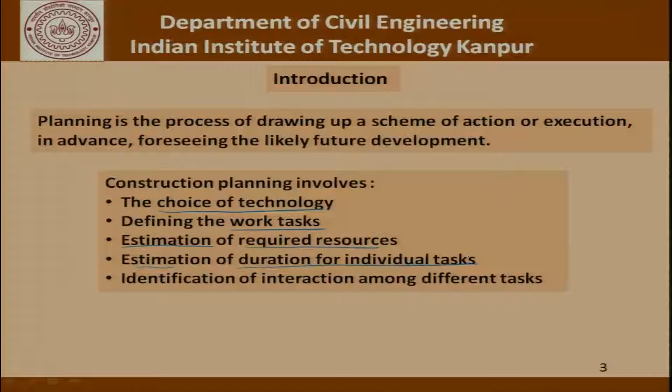Then there is this aspect of estimation of required resources. We break a job down to different activities, different tasks, and then try to find out for each task or job what are the resources required in terms of manpower, equipment, consumables, and so on. The estimation of duration is a very critical part of our planning exercise. We must know whether a project is going to be completed in 10 months or 20 months or 2 months.

So, in order to be able to do that effectively, accurately, we have to have an idea of the resources that are required and whether or not by just increasing the resources that we allocate to a particular activity, can we keep reducing the time. It may not be possible sometimes to reduce the time beyond a certain point.

Identification of interaction among different tasks. This is a very critical part of our understanding when we try to analyze whether we can take up one task without completing some others. Which tasks in a particular project can be independently taken up.

If one process requires another process to be completed, for example, in the kind of boundary wall example that we talked about, we cannot fabricate the angle unless the angle has been procured. We cannot fabricate the reinforcing bars for the footing or the columns unless they have been procured. But once they have been procured, we can go ahead and fabricate the reinforcement cage for the footings or for the columns. So, basically identification of interaction, determining the interdependencies is a very important part of project planning.

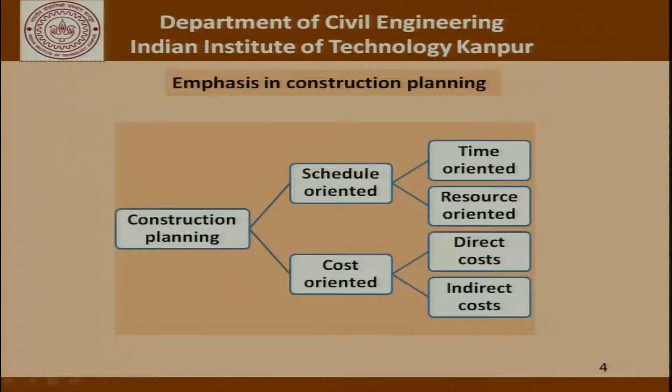So, the emphasis in construction planning is either schedule oriented or cost oriented. In the schedule oriented side, we have time and resource orientation, and in the cost oriented construction planning, we are most of the time talking about direct and indirect costs associated. Now, we talked about the different types of plans. It could be the time plan. So, basically what we are talking about here is the schedule. How much time it is going to take to complete an activity. If we are slipping, then what should be done to cover the time and so on.

Then there is the cost plan. How much is the project going to cost? What is the kind of cash flow that we need? If we want to accelerate the project, try to complete the project earlier, what is the kind of additional cost that we need to incur and so on.

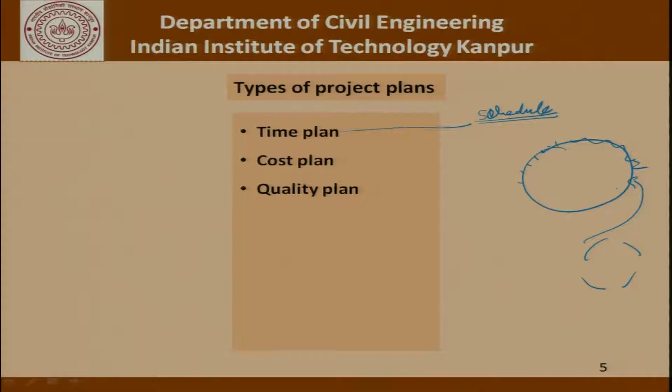Then there is the quality plan. A project has different activities. If you consider a tunneling project, there is a boring of the tunnel that has to be done. There is a stabilization of the soil that has to be done. Independently, we are making segments which have to be then brought and assembled at site. So, now each of these activities has to have a quality plan. We should know what are the parameters to control as far as quality is concerned for each of these activities, and have a plan so that the people who are executing those activities are aware of what are the quality control measures to be adopted.

Similarly, there has to be a safety plan. We must make sure that there is no accident at site. There is a manpower plan. Depending on the time of the project, different kinds of people, that is, people with different skills are required, and we must know what is the kind of people that are required at different points in time, so that we are able to either recruit them into the company or transfer them to that site from other sites and so on. Then there is a materials plan, equipment plan, and a finance plan.

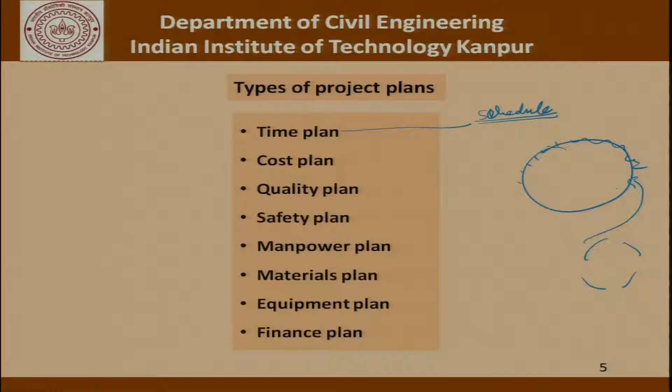So there are different ways of looking at the planning exercise. So continuing with our discussion, as far as the project plans are concerned, time plans basically refer to completing the work ahead or later than scheduled dates, which may make remarkable difference in the project completion. We have an estimate of completing the project, but there may be a bonus associated with completing the project earlier, and there may be a penalty associated with completing the project later. So these are things which we have to keep at the back of our mind when we are carrying out a planning exercise in terms of time. Of course, as I said, it will affect the overall cost of the project.

As far as the cost plan of the project is concerned, since they take a long time to complete, it is obvious that all the funds are not required at one point in time. So we have to keep in mind the concept of cash flow that we've talked about, and contractors often fund their projects from working capital, a part of which is raised from investors, bank loans, whereas the rest comes from mobilization advances and running account bills. So all these things have to be carefully thought about and foreseen.

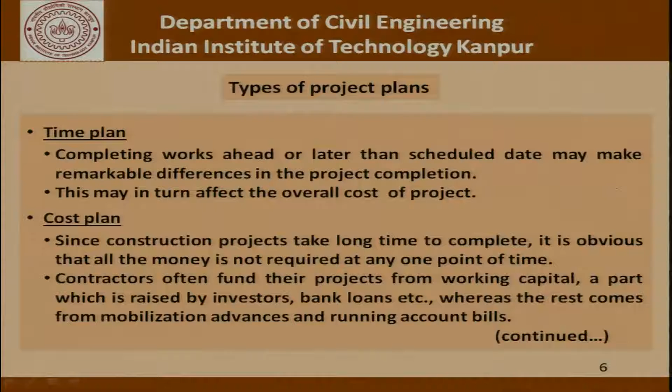So foresight is a very, very important part of a construction manager's job, and that's why some of these things are difficult to appreciate unless there is a real example, unless there is real experience that you have. So the idea as far as this course is concerned is to basically introduce you or expose you to some of these ideas so that you're better prepared for professional experience.

Now coming to the quality plan and the safety plan, the focus on the quality plan is to ensure that the resource procurement, construction procedures and tolerances are within the set guidelines provided by standards of relevant agencies. So this relevant agencies is very important because depending on the agency involved, there would be different tolerances. That happens because the criticality of each of these activities is different depending on concepts like consequence of failure, importance of the structure and so on. The emphasis in the safety plan is to ensure no accidents. We must ensure that there are no accidents at site which could lead to loss of life and property.

If we talk about the manpower plan, it mainly focuses on estimating the workforce and deployment of manpower in appropriate functional teams with an emphasis on optimizing cost and time. As far as the materials plan is concerned, the primary emphasis is to identify, estimate, procure various materials of required specifications by minimizing their idleness in inventory. We must remember that the effort should really be to procure the material in time for its deployment or use at site. There is no point in buying the material way in advance before it is used, because that is dead inventory, that is dead cash. We should invest the money only when it is really required.

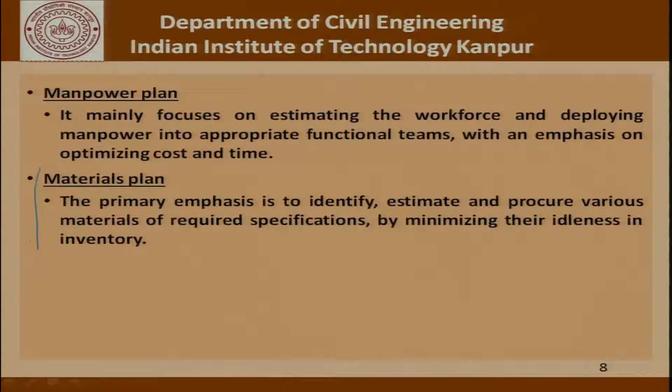So an inventory plan requires us to know exactly when a particular component or a particular material will be required as far as construction is concerned, and then taking into account the time that it takes to procure the material. Some of these materials or components may not be readily available just off the shelf. So there would be a certain time for the manufacturer of those materials to put that thing together. There may be a time involved as far as transportation is concerned. So your inventory team has to have a plan of how and where these different materials will be procured from, how they will be transported to site in a manner that their non-availability does not become a reason for delay in the project.

As far as the equipment plan is concerned, effectively this plan focuses on procurement of suitable and productive equipment by purchasing, renting or leasing in a manner that minimizes the period of idleness of operating them at site.

So we should know when we need cranes, what size cranes, we should know what size of welding equipment, we should know what size of concreting equipment, we should know what kind of JCBs or excavators, and so on and so forth.

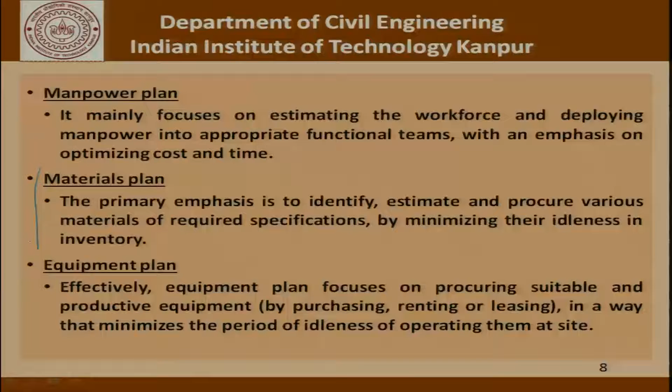Now, before we proceed further with more analysis of planning and scheduling, I would like to also introduce to you the idea of a work breakdown structure. Now, this WBS refers to a hierarchical tree structure obtained through decomposition of the project into phases and tasks.

We basically try to break down, as the name suggests, we break down the project into activities and sub-activities, try to divide it into different classes, and then try to look at the resources required for each activity. We must remember that the more thorough the WBS, the better is the planning and smoother is the project execution.

If we are able to foresee exactly how the project is going to be executed, we will be in a much better position to execute the project smoothly. If we are not able to foresee certain things, then the project will be stop and go. Something will happen which is unforeseen. The project will stop. We will make some stopgap arrangements, make the project get started again, and so on.

Whereas if we have seen all the possibilities, we know exactly the flow chart which will be followed. If this happens, then what should be done? If this happens, then what should be done? Then the execution is much more smooth. And that can be achieved if we have a clear breakdown structure with all the kinds of possibilities worked out.

Now, this is what I mentioned, the project is broken down into manageable chunks. We are working from a whole to parts kind of a philosophy, and this basically is a framework for planning, scheduling, estimating, budgeting, monitoring, and controlling the project. So, all these important functions relating to a project can be carried out if we have a well planned and well done work breakdown structure for that project.

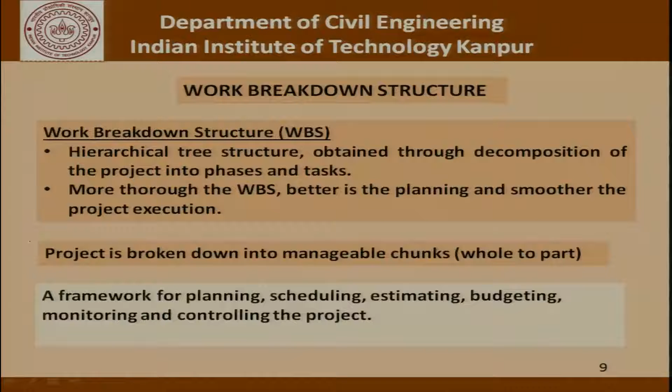Now, let us try to see what a work breakdown structure really means through an illustrative example, where we are asked to list the activities and create the WBS for a road construction project, and also discuss the interdependencies of the activities. So, what we are talking about is a project where a road construction has to be carried out. And what we will try to do is to break down this project into activities. Of course, we will stop way short of what is a final breakdown structure, but I think you will have some idea about it.

As far as the set of activities is concerned, let us say there are 8 of these activities: tree cutting, general excavation, grading general areas for leveling, excavation for utility trenches, which is services, compacting the subgrade, installing sewer lines, which is services again, installing electric poles, which is again services, and finally laying the pavement. So, we have broken down a project of pavement construction into these 8 activities.

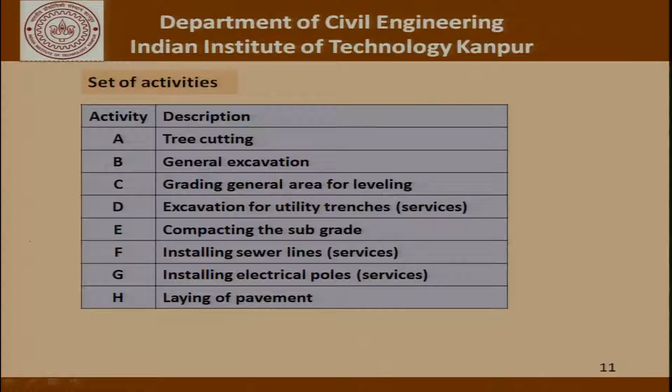I must point out at this stage that this is not necessarily the only way in which this activity breakup can be done. It depends on the engineer actually as to how he defines the different activities. Now, another way of drawing up a work breakdown structure for this project would be as shown here. So, we divide the road construction into general, structures, and carriageway. As far as general is concerned, we talk in terms of mobilization, supervising, finance and accounts.

As far as structures are concerned, we break it up into culverts and bridges, where we say that, well, culverts are further broken down into excavation, concreting and reinforcement work, and a similar such structure can be drawn up for bridges. And when it comes to the carriageway, again there is earthwork, mixing and paving, markings, median, plantation, etc.

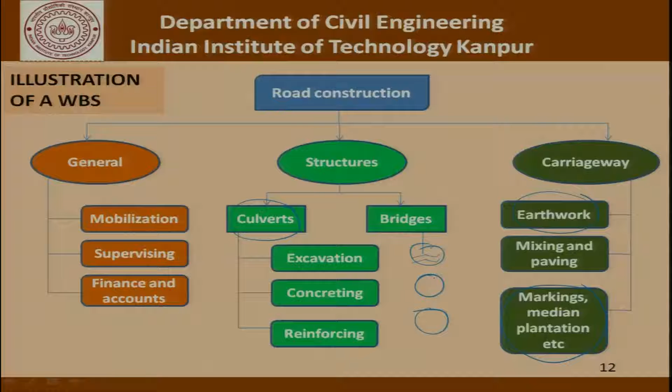So, this shows different ways of how a work breakdown structure can be drawn up for a given project, and this facilitates planning. So, when we talk of culverts, we can draw up a plan. When we talk of markings and median plantation, we can draw up a plan, and so on and so forth.

So, going back to the previously defined 8 activities, now let us try to see what is the precedence relationship. What is the kind of relationship that governs one activity with respect to the other? Now, as far as tree cutting is concerned, it does not require any preceding activity, except of course, what it assumes is that something called land acquisition has already been completed. So, unless the land acquisition has been completed, there is no question of cutting trees.

In fact, if you read literature as far as road construction is concerned, you will realize that land acquisition is often a bottleneck as far as construction work in highways is concerned. What often happens is, while constructing a road from this point to this point, you may have acquired land for this package, and this package, but there will be a package somewhere here and a package somewhere here where land acquisition is an issue.

So that does not mean that you do not start the construction work. Very often we start the construction work, hoping that while the construction reaches this point, these pockets of unacquired land will also be acquired. So, coming back to our example, if the land acquisition is cleared, we can go ahead with tree cutting without any preceding activity.

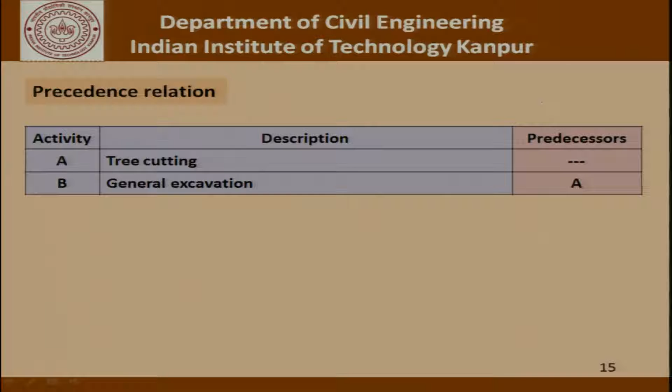But as far as excavation is concerned, it is not proper to start excavation unless you have completed activity A, which is tree cutting. Activities C, D and E, that is general grading of the area, excavation for utility trenches and compacting the subgrade, can all be started only after a general excavation has been completed. Activities F and G, installing sewer lines and installing electric poles, depend on C and D, that is grading the general area for leveling and excavation for the utility trenches.

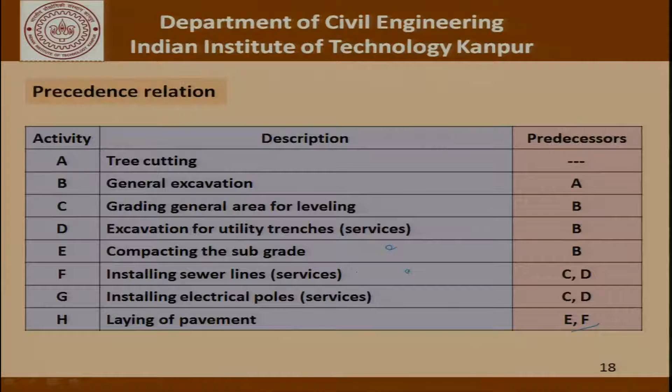Finally, the laying of pavement depends on E and F, that is compaction of the subgrade and installation of the sewer lines, because very often the sewer lines run below the pavement. So only once you install the sewer lines can you complete the laying of the pavement. From this example, it is clear that there exists an interdependency among various works in a project, and they can be represented in a logical sequence. Here we represented it by a table listing the activities and a column with the required preceding activities.

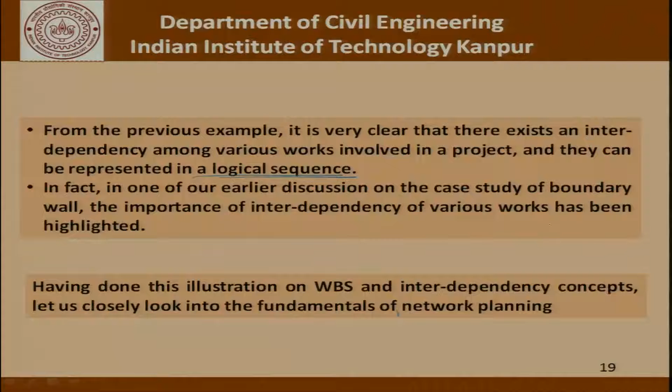In one of our earlier discussions, on the boundary wall, we had given 19 activities as part of the breakdown of that construction and left it to you to think about the interdependency the way we talked about just now. Having done this illustration on the work breakdown structure and interdependency, let us look at the fundamentals of network planning, because we would like to represent the activities by way of a network. That is much easier to represent, explain and use when monitoring the project as construction goes on. So, before applying networks to construction, let us study the network fundamentals.

Let us define a few terms. An activity is an item of work that involves consumption of resources and time, and time can also be looked upon as a resource, and produces quantitative and measurable results. Activities take place between events and have a well defined start and end. So, if there is an activity called digging the trench or concreting a roof, there is a well defined start and completion. An event indicates the start or completion of one or more activities. An event does not consume any time or resource.

Of course, there are some dummy activities which we will see when we look at the logical compulsions in drawing up networks and representing interdependencies. These dummy activities do not consume any resource or time and are used only to complete the logical interdependency among the different activities. And what is a network? It is a graphical representation of activities in terms of nodes and arrows to show logical interdependency between activities.

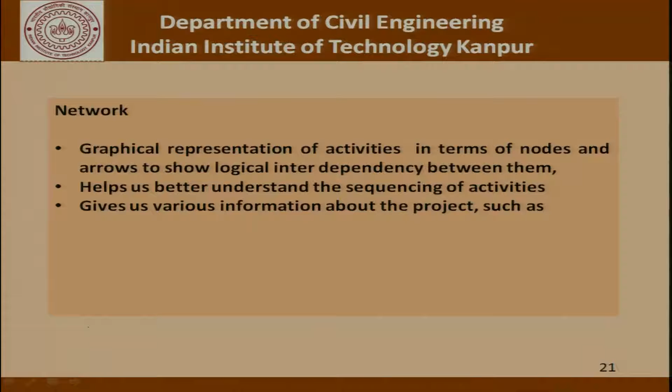The network helps us better understand the sequencing of activities, gives us various information about the project, such as the time required for completion of a project, the activities that need to be monitored more closely than other activities, and the basis of plans for material procurement, manpower deployment, cash flow, and so on. And of course, we can also use this whole concept to determine the probabilities of completing the project within a certain time.

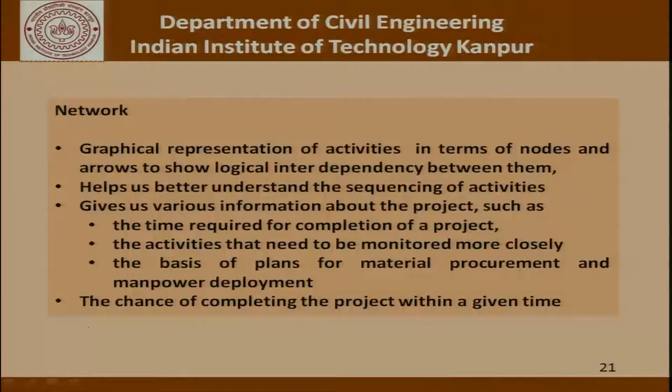Now, there are two types of networks. One is called the activity on arrow. Activity on arrow means that there is an activity A and there is this arrow between node i and node j. So, this activity A is actually represented as ij, where i represents the start of that activity and j represents the end of this activity, and A itself sits on the arrow connecting i and j. So, these arrows are directional. So, it is an i to j arrow and not j to i. It is not interchangeable, it is an activity ij, which means it starts at i and ends at j.

On the contrary, we can have an activities on node kind of a network, where A and B are represented as nodes and there is an arrow in between, which shows the dependence, that is B depends on A. You cannot start B unless you complete A. So, if A and B are related the way they are shown here in the activities on node representation, then what we will do here is to put B here and put a node k here, which means that A is the activity ij. When this activity is completed, B can start and B is represented as jk. So, the node j is the start of activity B and is also the end of activity A.

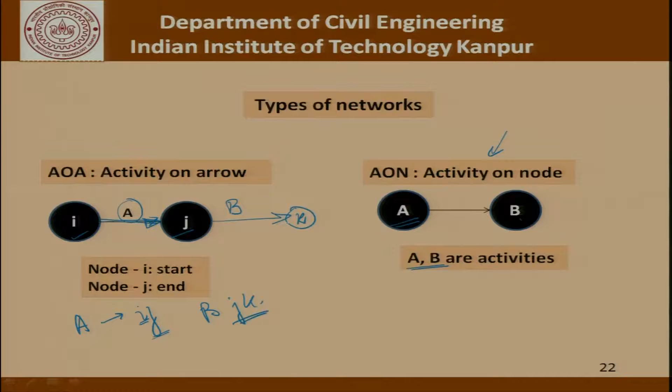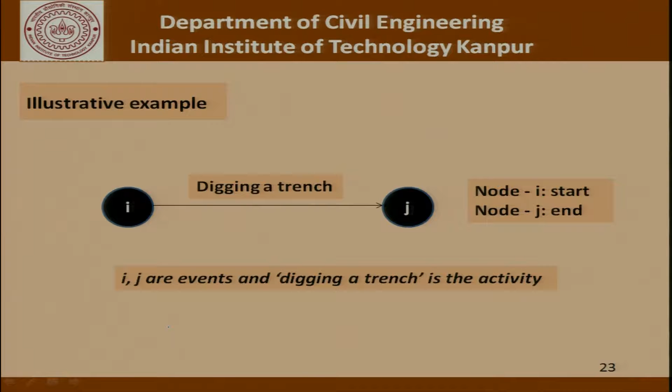So, these two representations are the same, except that in this case the activities are on the node, A has to precede B. In this case the activities are on the arrow and i, j, k are the nodes. So, the activities are, to repeat, ij and jk. Now, continuing with this example, there is an activity, let us say digging a trench, ij. It basically represents the start of the digging of the trench and completion of digging of the trench.

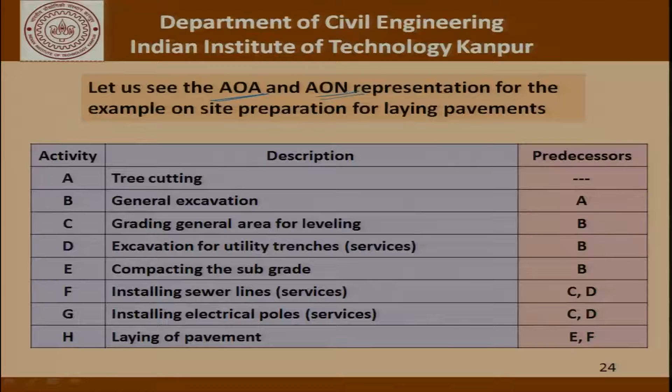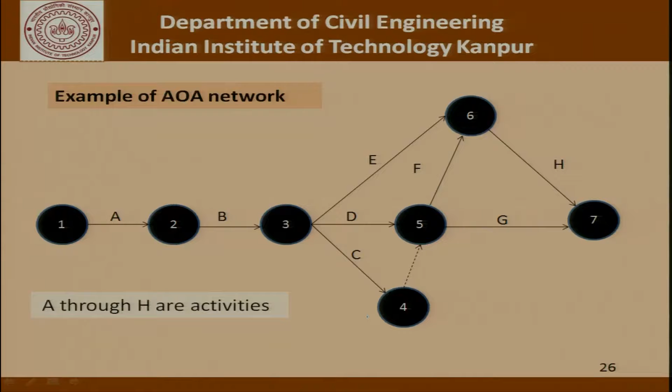So, now let us try to do the same exercise in the activities on arrow, and I leave it to you to make sure that the representation is correct. A is 1-2, B is 2-3, C is 3-4 and so on and so forth. So, I leave it to you to verify that A does not depend on anything, B depends on A, C, D and E depend on B, F and G depend on C and D, and H depends on E and F.

Now, here you will find this activity here. This is precisely what is a dummy activity, basically to show that G depends on both C and D. The reasons for that will become clearer in some other examples that we do later on in this course.

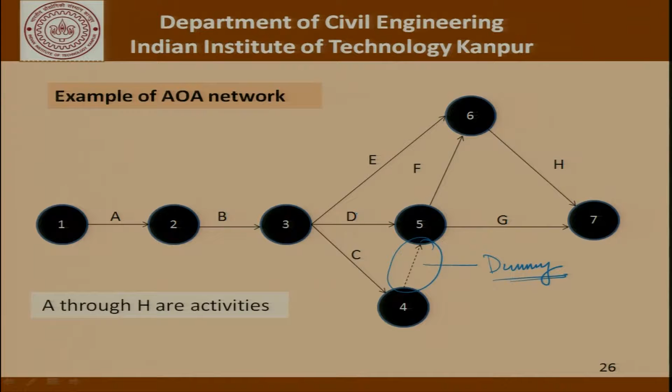Now, continuing with our discussion, let us try to see what are the basic rules to be followed when drawing networks. Usually there is an event included as a start of the project and an event called the end of the project. Each activity should be represented with only one arrow pointing towards the direction of the progress of the project. No two activities can have the same i and j. For example, both A and B cannot be represented as 1, 2.

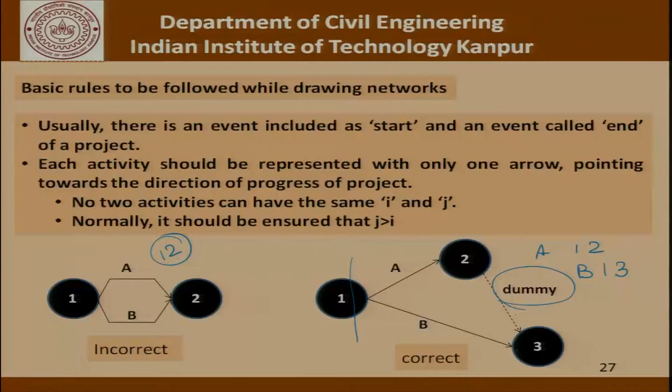What has to be done is that we have to use a dummy activity and try to say that, well, activity A is 1, 2 and activity B is 1, 3. The node 1 represents the start of activity A and the start of activity B. The node 2 represents only the end of activity A and the node 3 represents the end of activity B. Normally, it should be ensured that j is greater than i.

Now, the following checks usually help in drawing a network. The first thing being, which activities must immediately precede a given activity. Then, which activities must immediately succeed a given activity, and finally, which activities can be done concurrently. So, if we are able to keep track of these three issues, we will be able to draw a network.